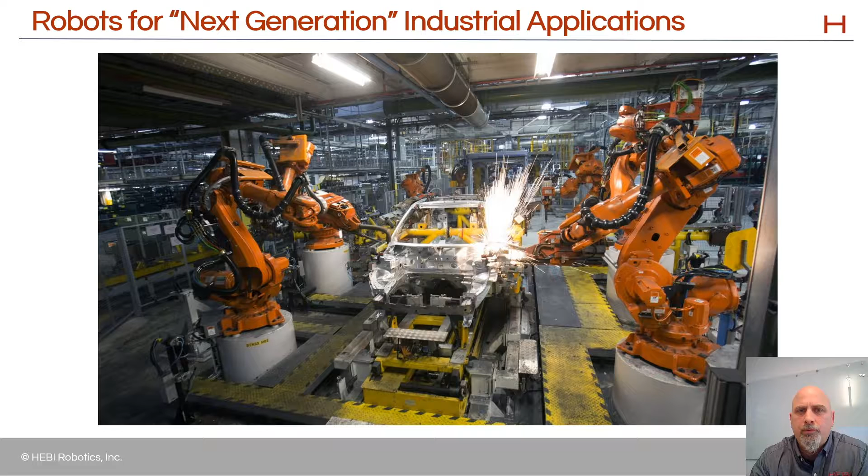This type of robot can work really well in the factory, but when you try to address opportunities for next generation automation in the field, in industries like construction and security, applications like confined space inspection, and more general industrial inspections in a variety of industries, your robot needs to be a bit different.

In these cases, you'll need a system that can be easily deployed in different environments, so something that's lightweight, very power efficient, and often the processes you're automating require more human-like motion as opposed to the rigid precision that's so important for manufacturing automation.

You're also likely dealing with highly variable workspaces, so you'll need a robot system that is at least reconfigurable, but preferably very customizable. These industries and next generation applications require different breeds of robots, which is why you're starting to see things like quadrupeds and different types of crawlers out in the field. My focus for today's discussion is on snakes or snake-like robots.

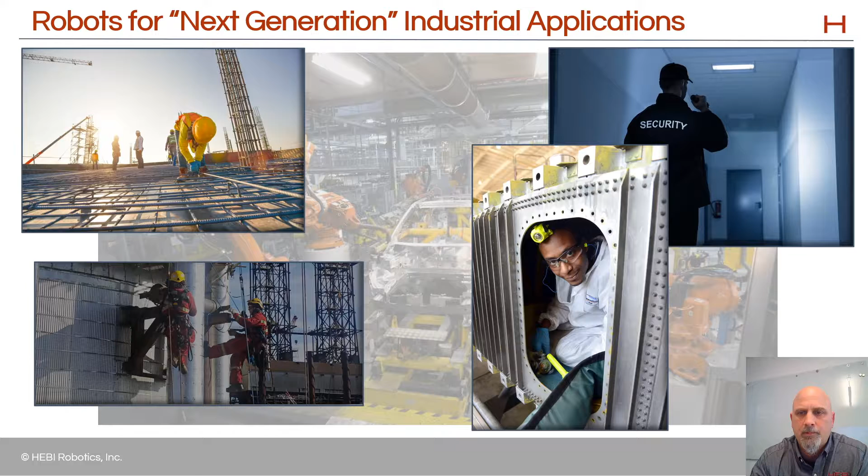Snake robots have a rich and storied history going all the way back to the 1970s when Professor Shigeo Hirose pioneered snake robot research in his lab at the Tokyo Institute of Technology. His lab used approaches like active cord mechanism and created snakes with wheels, rollers, and even swimming snakes.

Professor Hirose's lab spun off a company by the name of HiBot that I'll bet a lot of you are familiar with today. There are a number of other companies that use snake-inspired robots to address automation in industrial inspections and maintenance, including OC Robotics and, of course, HEBI Robotics. That's us. By the way, HEBI is the Japanese word for snake, which is our way of paying homage to the Japanese origins of snake robots.

One of the HEBI co-founders is Professor Howie Choset of Carnegie Mellon University. He's a robotics pioneer in his own right, and it's interesting to note that in addition to founding HEBI Robotics, he's created a number of other companies, including Medrobotics, where they develop snake robots for surgical applications.

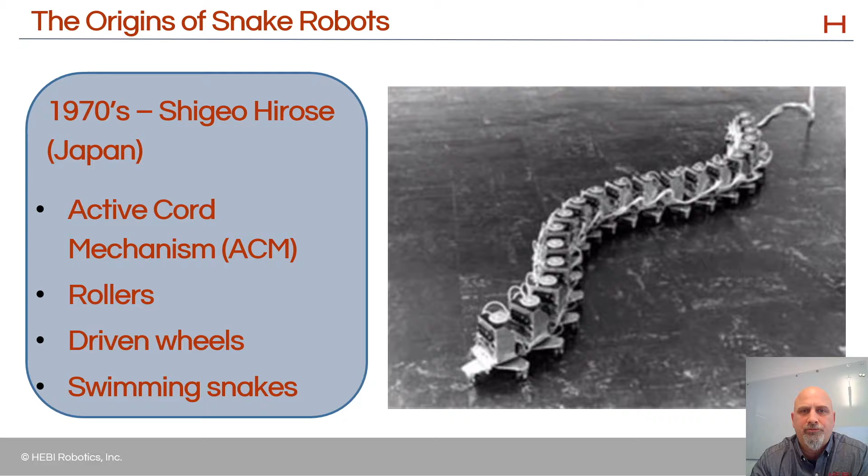There's a lot more to the history and evolution of snake robots that I won't cover here, but it's really interesting, and if you are also interested, I encourage you to view a recorded webinar that one of the other HEBI co-founders recorded earlier this month on the evolution of the snake robot.

So let's skip ahead to some recent snake robot history and take a look at the work at Carnegie Mellon University that led to HEBI Robotics.

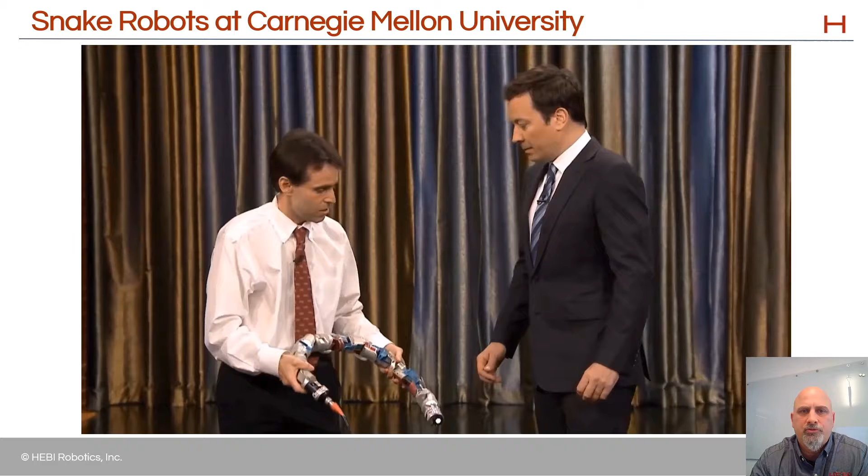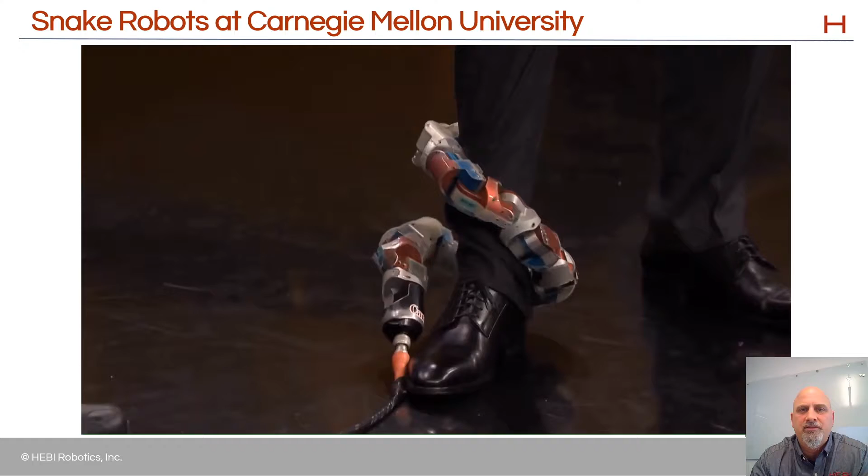I'll start with this fun video of Howie demonstrating a CMU snake robot for Jimmy Fallon on The Tonight Show. A really important contribution of Howie's lab is work focused on enhancing the ability of snake robots to sense and control torque. This enables the robot to interact with the environment in really powerful ways, which is important for a lot of the inspections and maintenance tasks that we want to automate.

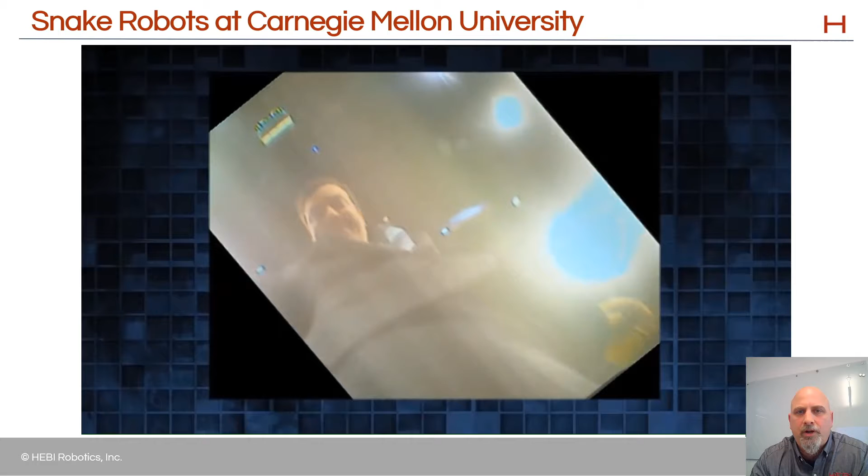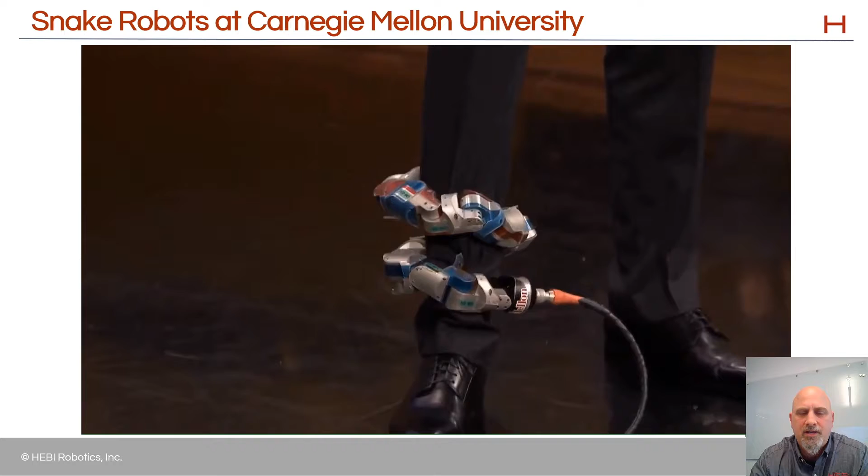Here you can see the robot using its force or torque sensing capabilities to squeeze itself around Jimmy Fallon's leg with just the right amount of force so that it can rotate and crawl up. And of course, there's the camera at the head as well. Clearly, that'll be important for visual inspection applications. There's the robot crawling back down the leg again.

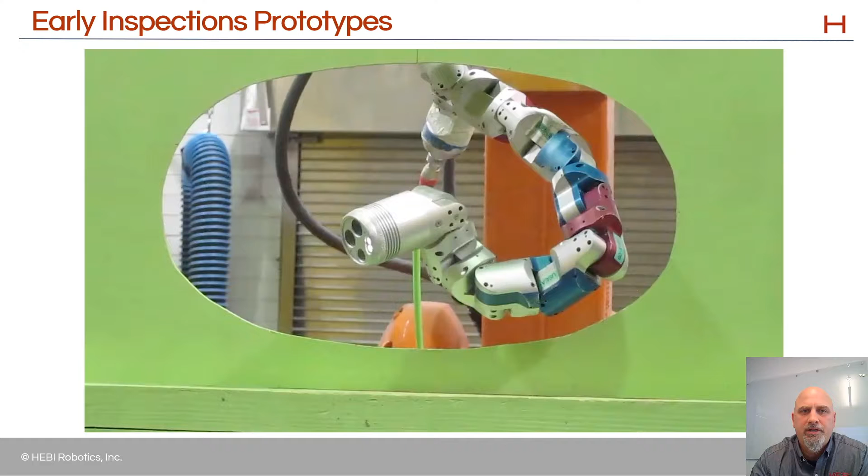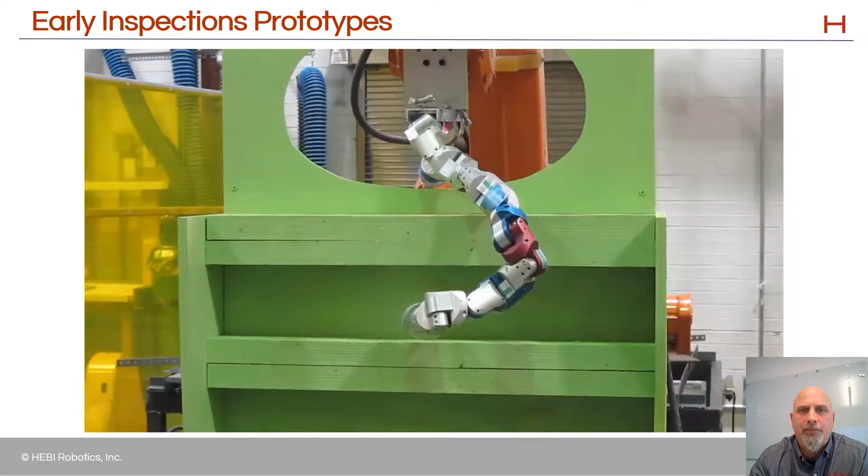Not all fun and games at Carnegie Mellon University. Early on, we identified snakes as a really useful solution for challenging industrial inspection applications. The robots are really lightweight, highly flexible, and have a very slim form factor, so they can effectively navigate really tight spaces and maneuver around obstacles to deliver sensors for inspections to confined spaces.

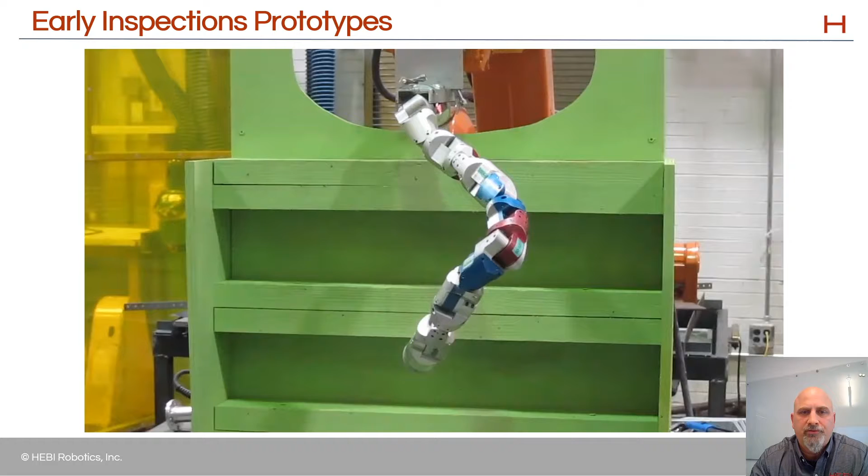As you can see in this confined space mock-up in the lab at Carnegie Mellon University, the robot can do a really great job of getting in through that tight manway and navigating around corners and around obstacles to bring that camera head to different areas of that confined space that would be difficult for a human to get to.

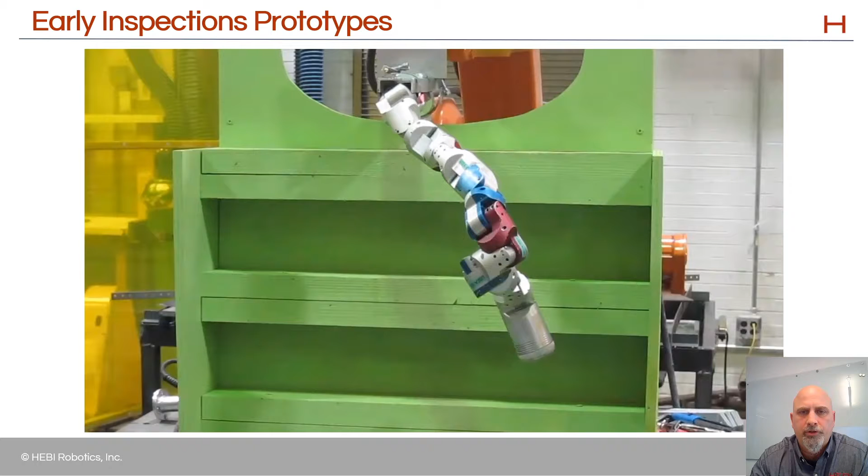Now, this snake robot form factor can be really useful, but it does have its limitations. On the plus side, snake robots are really capable at interacting with the environment, especially given the contributions from the Carnegie Mellon Snake Lab. Snake robots can navigate tight spaces, given that they have so much flexibility. They're typically very lightweight with a small form factor, especially compared with conventional robots that grew up around manufacturing automation. So that makes them far more easily deployable than those conventional robots.

On the negative side of the ledger, snake robots are really hard to control. There are a lot of joints that are interacting with one another in really complex ways, and that presents some significant control challenges. They're difficult to build. They're very complex mechanisms, and so building a snake robot can be really quite the challenge.

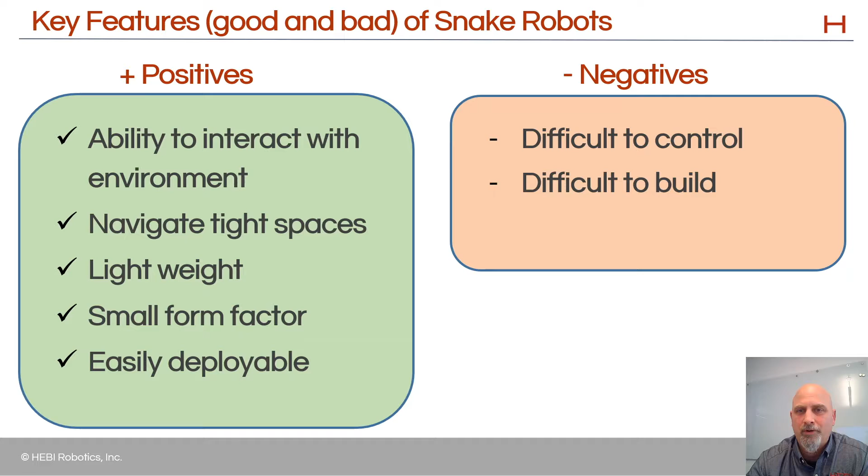And from a business development perspective, there's no real killer application that's obvious for snake robots. There are a number of applications that snakes are really good at, but for most of them you can find some other form factor that would be a bit more efficient. This makes it really difficult to scale snake robots. And so as a result, what we find is that a lot of next generation robots are evolved from or inspired by snakes, but aren't necessarily snake robots per se.

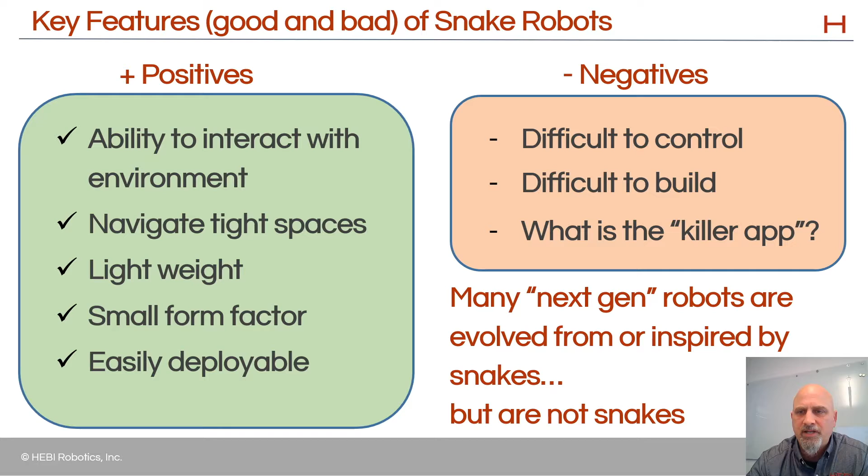So with that in mind, let's go back to CMU and take a look at some additional important work done at the lab. Now in the Snake Lab, Howie and his team wanted to find ways to streamline the design, production, and control of snake robots. And in the effort, they made some key technical contributions that made snake robots more practical, and in fact made a wide variety of robots more practical.

For example, typically in an industrial robot, there's a controller that tells all of the joints what to do in order to coordinate the motion of the robot. Howie and his team were early to the game in terms of exploring a more modernized approach to robot control, where there's a microcontroller at the joint level.

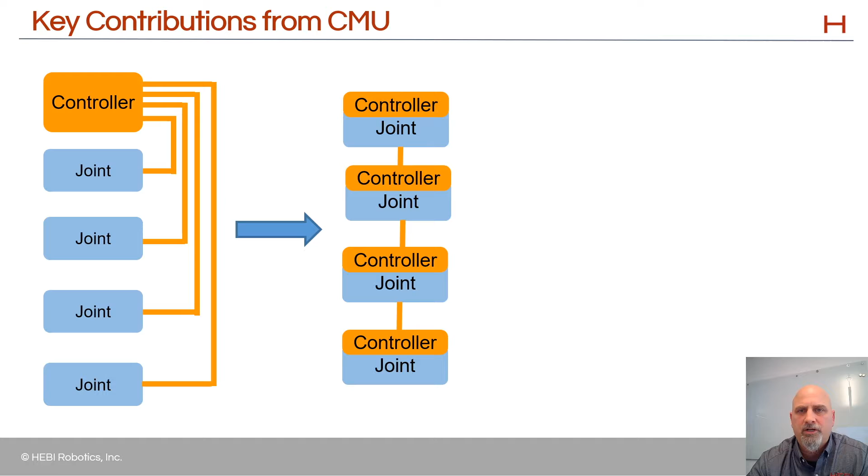With this type of architecture, you can have a lot more flexibility in designing new robot systems. You can still control the entire robot system from a controlling computer, but now the low-level processing can take place at the joint level, and the joints can more easily be swapped in and out. The robot can be more easily reconfigured or customized. At the same time, they developed powerful control software to manage a lot of the math behind making the robot move. This made it much easier to build and control snake robots.

But then what we started to see that was really interesting in the lab is that these modular robotic building blocks found their way into other types of robots as well. So this Lego-like system that was designed to make snake robots more efficient found its way into robotic arms and crawlers and all sorts of things that started to pop up in the lab.

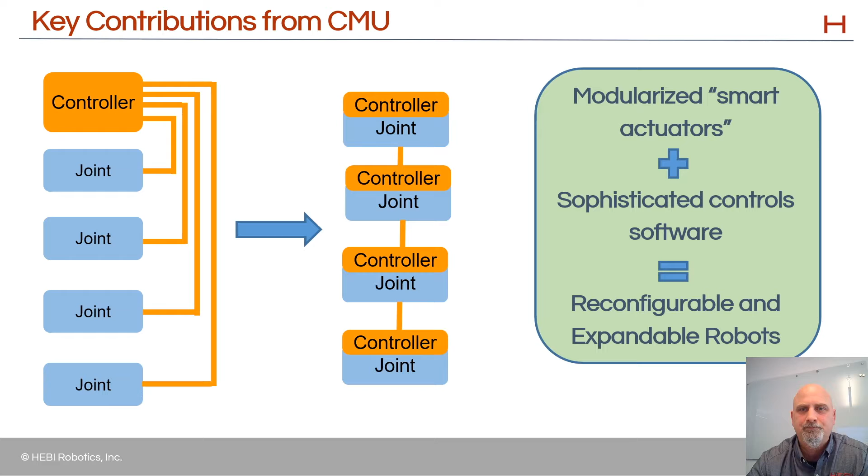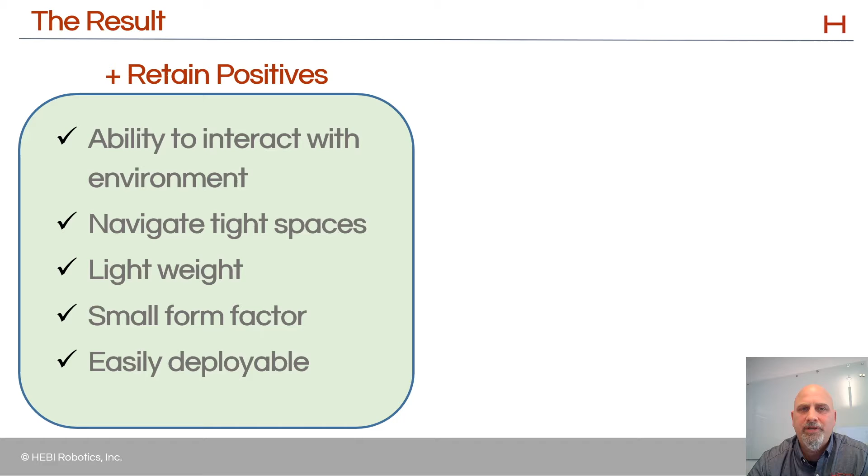And with this system, the team was able to create a platform for robotics that retained all of the positives associated with snake robots, those same things that we talked about a few slides ago, the ability to interact with the environment, navigate tight spaces, be easily deployable by virtue of the lightweight and small form factor. But we gained new capabilities that broke down barriers that had held snakes behind. For example, now we had the ability to rapidly design and iterate on that robotic design. And that in turn lowered development cost and made it possible to tackle highly variable, lower volume applications with various robotic form factors, snakes and beyond.

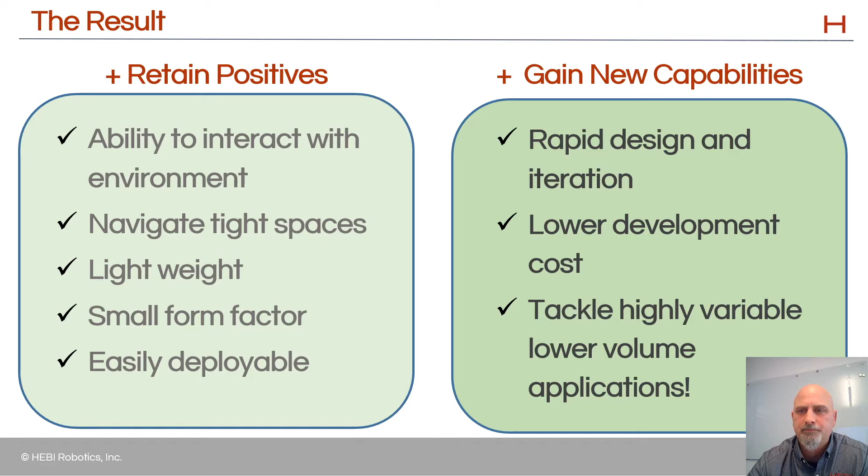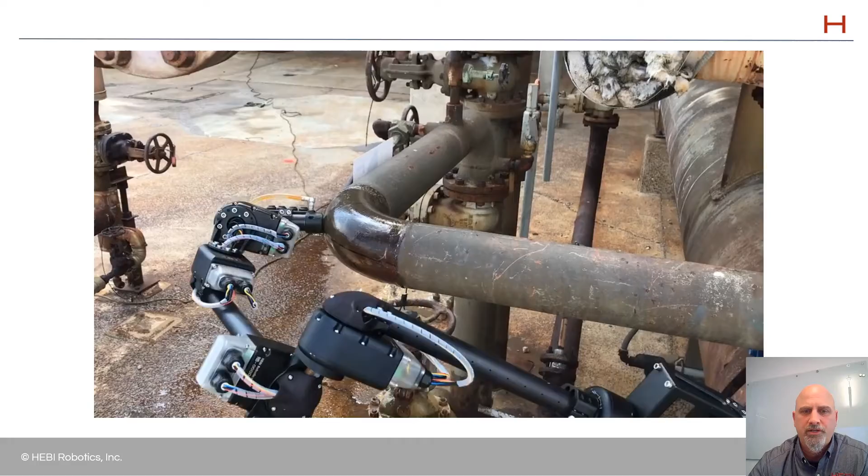So Howie and the team from his lab created HEBI Robotics to commercialize the platform and use it to address some of these next generation automation challenges not well addressed by conventional robots. And this takes us to where we are today. HEBI and our customers use the platform to create a wide variety of robots with an initial industrial focus on inspections and maintenance. And so this video you see here is an arm that we created to automate the inspection of pipe elbows and other complex geometries.

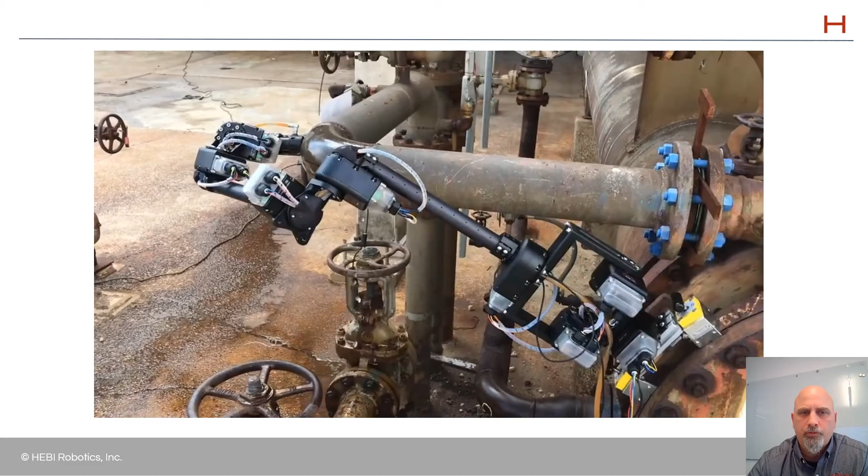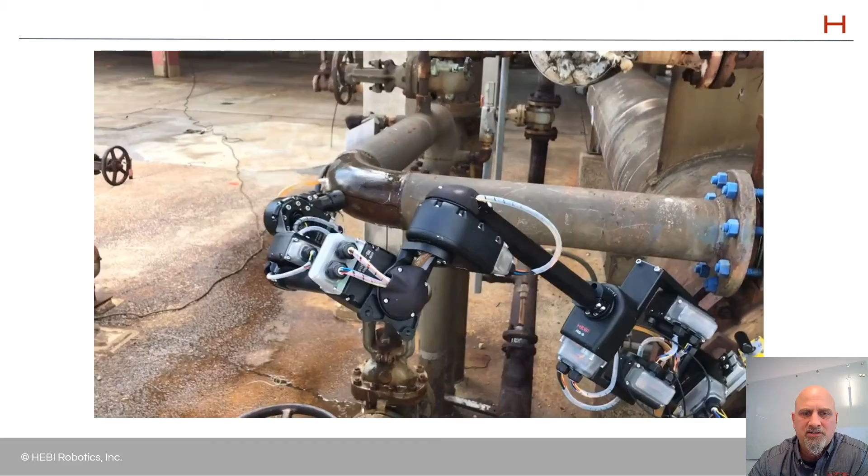So it has a UT probe at the end effector, and you recall how the system is able to sense and control torque, which made it possible for that snake to climb up Jimmy Fallon's leg by squeezing it with just the right amount of pressure. In this case, it's applying just the right amount of pressure to that end effector, which is a UT probe.

To collect thickness reading on this pipe elbow. And that same process can be applied to other complex geometries. With just a little bit of information about the geometry, whether it's a pipe elbow or a T or reducer, the system can take that probe and maintain contact between the surface and the probe to collect good thickness readings.

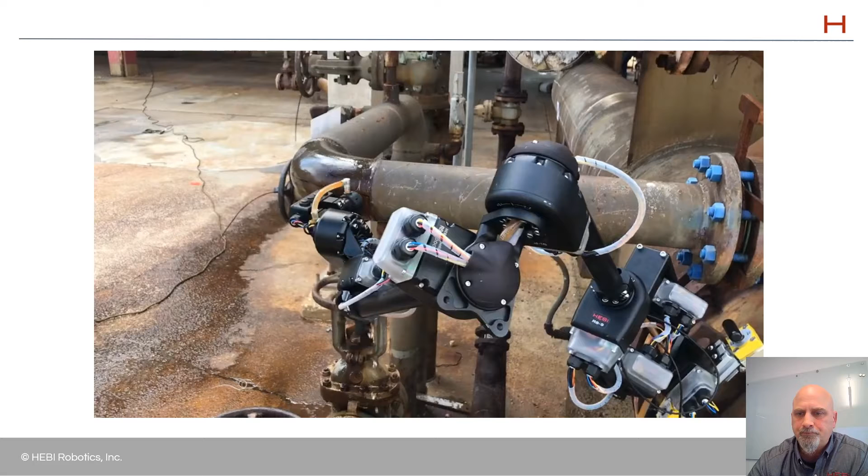And what I find to be really exciting are the possibilities for snake robots to address some really important applications in confined spaces. Confined space entry can be really dangerous, but difficult to automate.

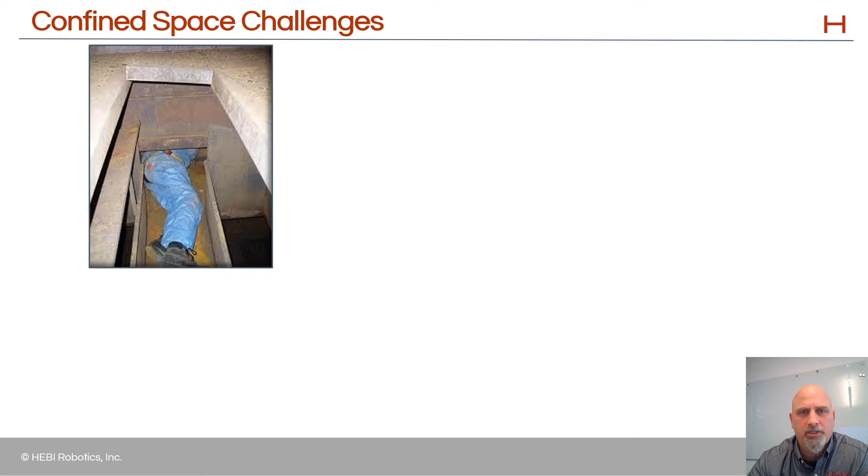So here are a few examples of some tricky workspaces. Here's a distillation tower with a manway where he's got to lay down, and the ergonomics here can be a nightmare. I would not want that job. But somebody's got to go in there and perform these inspections and maintenance.

Here's a steam boiler with some mechanical separators. There's bolts and sharp edges. Creates a really dangerous workspace.

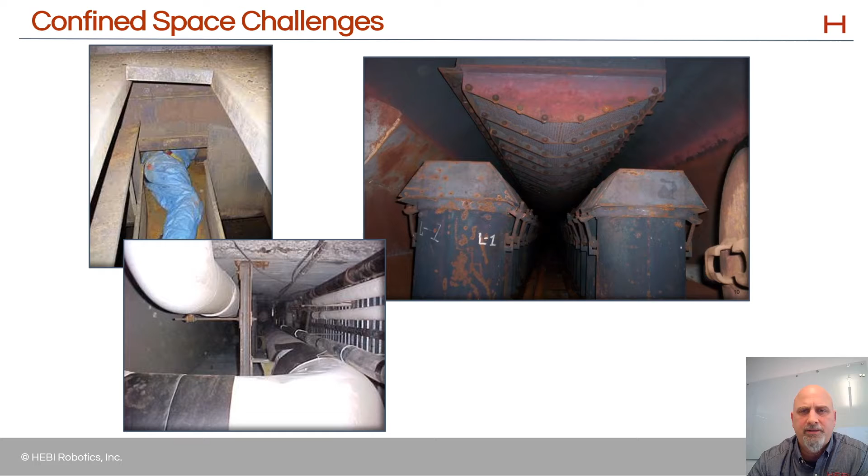This next picture looks like perhaps something below ground. There are some pipes that may need to be inspected. There are brackets and weld attachments, lots of things to maneuver. So you can imagine how it would be difficult for a person to get in there, but certainly for a robot to get in there.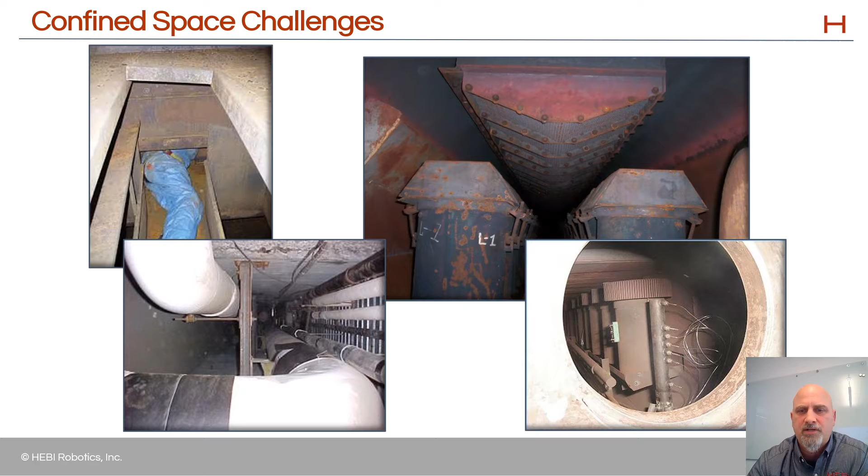So with that in mind, let me tell you a little bit about the demo that we put together for this presentation. For this demo, we built a mobile base kit with a snake-like arm as an appendage built out of our HEBI R-Series actuators so that we can emulate the visual inspection of this mock-up tank that you see in the background. In the demo, we'll include the approach to the tank, navigation within the tank, and maneuvering within the tank, and then extraction from the tank.

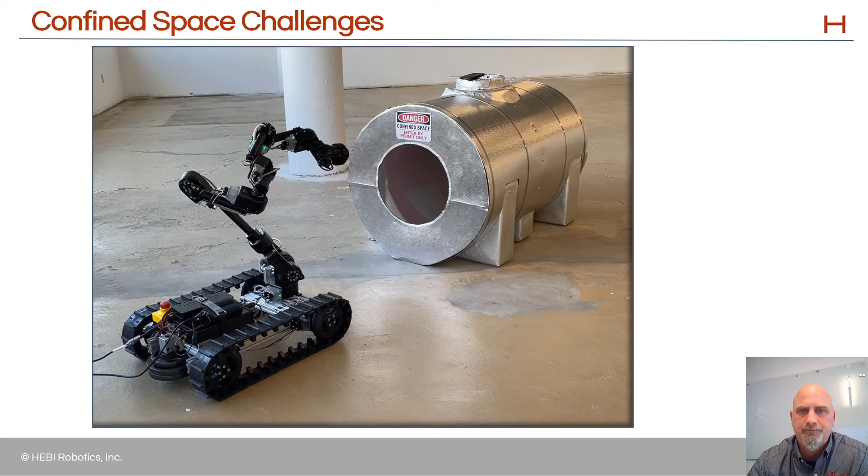Because getting the system out of the confined space is just as important as getting in. Here's a rendering of the tank that we put together.

So the robot is going to enter into that hole over on the left. It's going to navigate through a couple of plates, and the target that we want to get a visual on is that nozzle in the lower right rear, lower right on the picture in the rear of the tank.

So when you see this video that I'm about to show you, you're going to see the robot from the operator's perspective. So there will be the camera view that the operator sees, and you're also going to see the top-down view. So we put a camera in this hole at the top of the tank so that you could look down within the tank to see the robotic arm navigate through those plates.

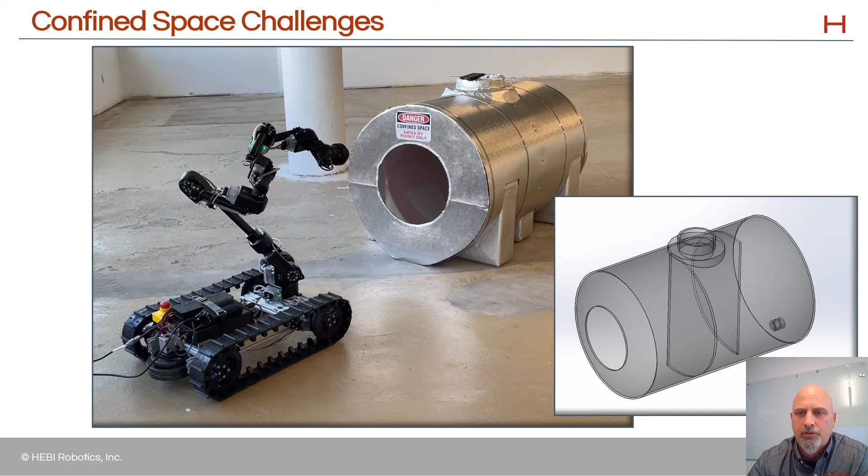So in this video, you're seeing the approach. So during any inspection, you've got to go approach the asset and make sure you're inspecting the right thing. So on the lower right, you can see the operator's view, and the upper left, you see the operator's controls. That's how they're teleoping the robot. And the arm is accessing the confined space.

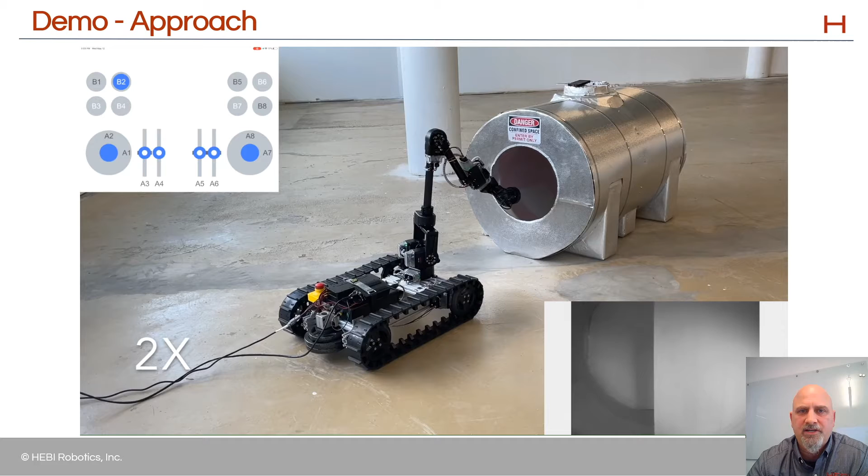Now, bear in mind that this is a wide open space with this mock-up demo. In a real life environment, you're probably going to have to navigate tight space to get to the asset that you want to inspect. And so that's why it's important to have that arm be really compact and tight and able to coil up and uncoil so that you can actually get it into the asset that you need to inspect.

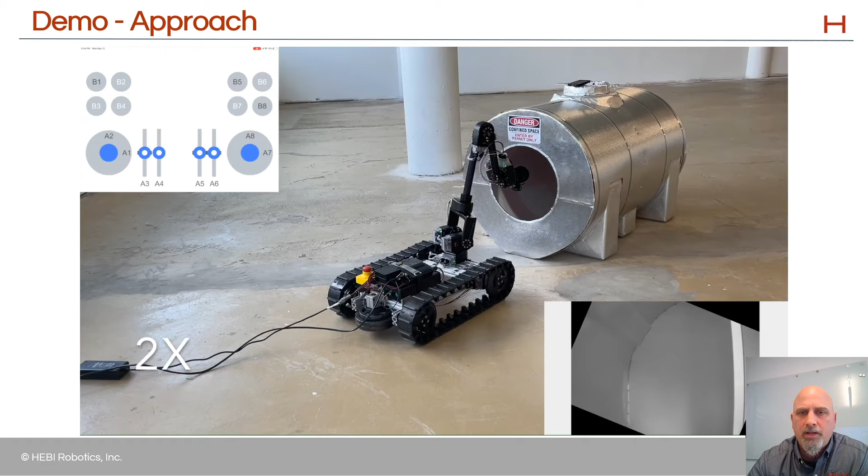Also note that the arm and the base are tightly integrated. This is a good example of how with the HEBI platform you can mix and match parts, mix and match arms and bases, or create brand new arms. And the control software makes it easy to control the entire system as a cohesive unit.

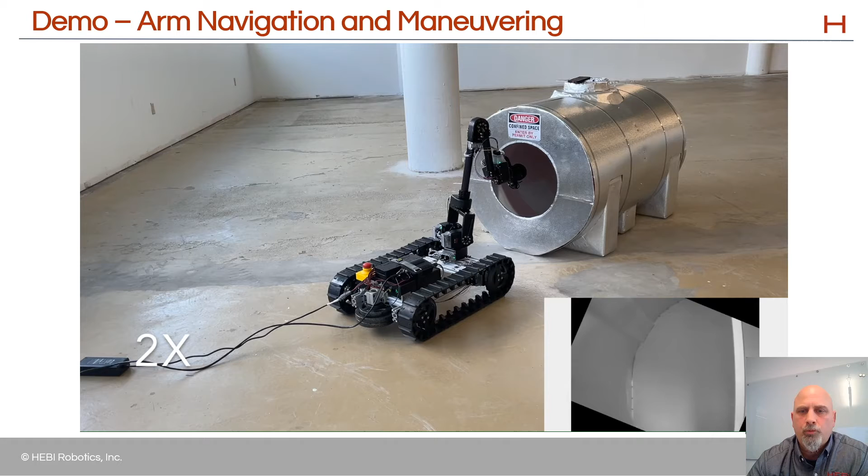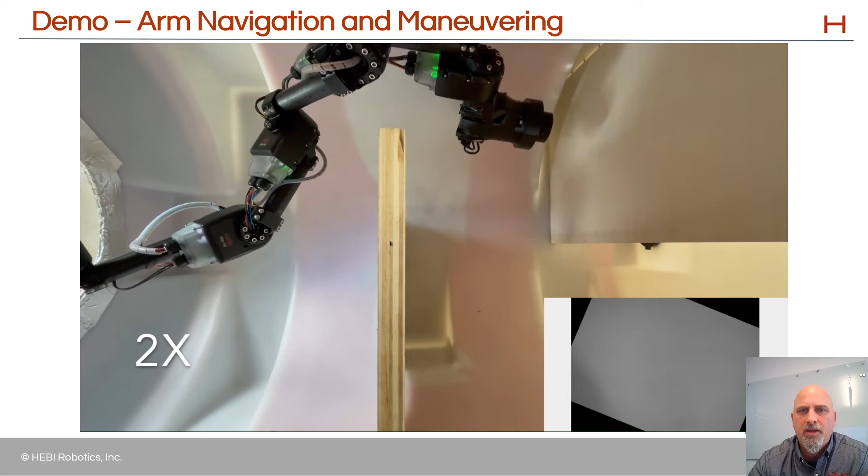Once inside the tank, the arm can unwind and maneuver about. Notice how it's being directed by the technician to look around at all the crevices and welds and so forth. Now I should point out that we're doing a visual inspection in this demo, but the system is designed so that it can interact with the environment. So we could put a probe at the end of the arm and do a UT inspection or some other sort of maintenance operation if we want.

Also bear in mind that this is a prototype we put together for the purpose of this exhibit. So we're aware that in a real life scenario, the cabling should be a little bit tighter so it doesn't get caught on the sharp edges and so forth.

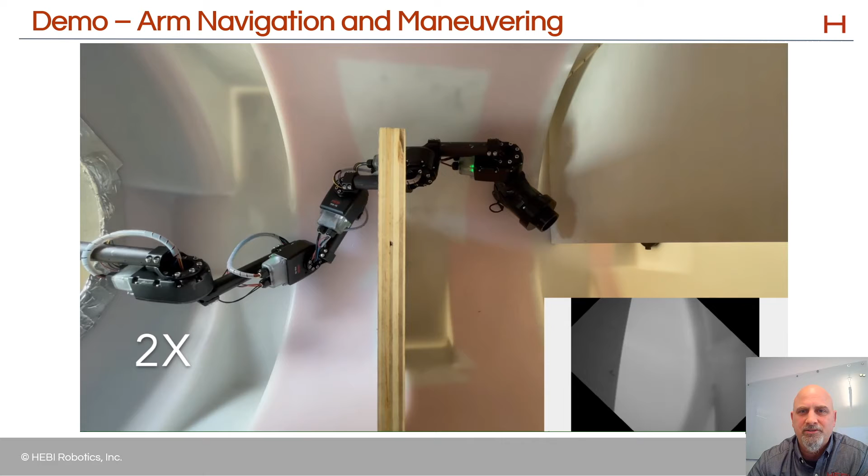Notice how as the arm maneuvers through the tank, you can't really hear it, but it's sort of bumped against the tank there because I've got the audio turned off. But since it can interact with the environment, the operator in this case is actually using that capability to sort of feel the way around that obstacle.

Remember, we're looking down into the tank, so it's navigating around the first plate and trying to find its way through the second plate, again sort of feeling his way around. We're using that ability to interact with the environment, which is handy for the operator.

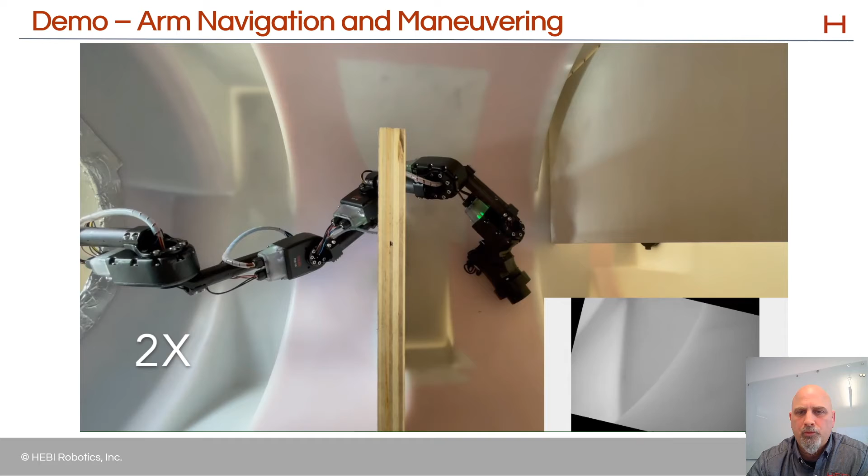Now it's going to move over a little bit, and in a moment you'll see how it identifies the target nozzle that we want to inspect. Notice how the camera remains in a fixed position, so the arm can move around and adjust the camera so you know your perspective at all times.

That nozzle, the top of the nozzle, is pointing up at 12 o'clock. That can be a real challenge oftentimes when you need to get a camera into a tight space - sometimes you don't know what's up and what's down. But the system here, that snake robot arm, can maintain the proper perspective of the camera so that you can more easily navigate.

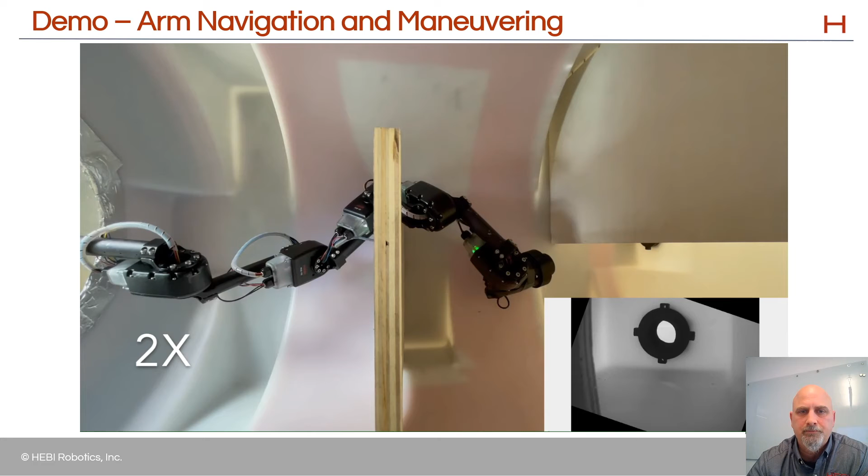Now, I mentioned earlier that there is software to take care of the math behind making the robot move. That comes in handy in a variety of ways. It's logging the position of all the different joints at all points in time and various sensors on that robot, collecting data that could be very useful.

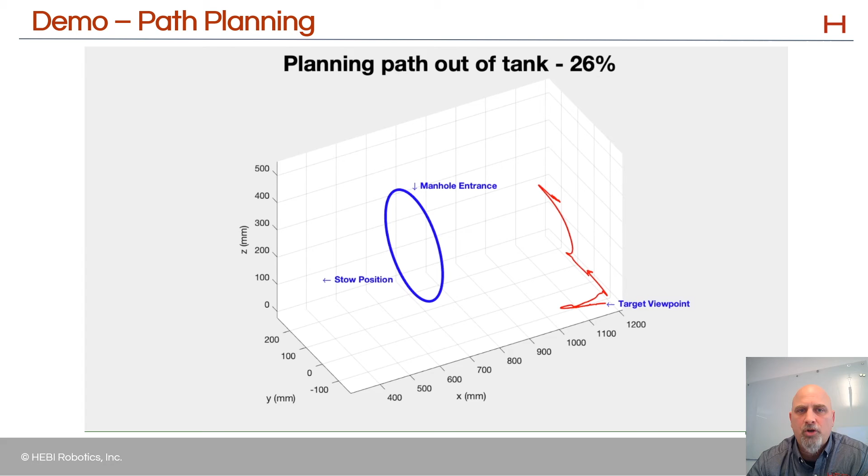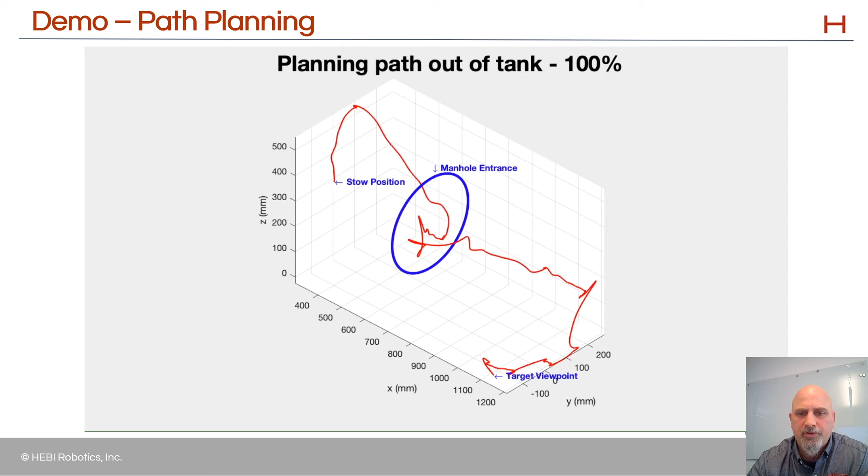In this case, we're using that positional information of each of the joints to track the motion of the robot, which will be very useful in getting the robot back out. So we're tracking the position of the robot as it enters that confined space. In order to extract the robot, we're just going to reverse course. Here's a little image of the system's recording of that path.

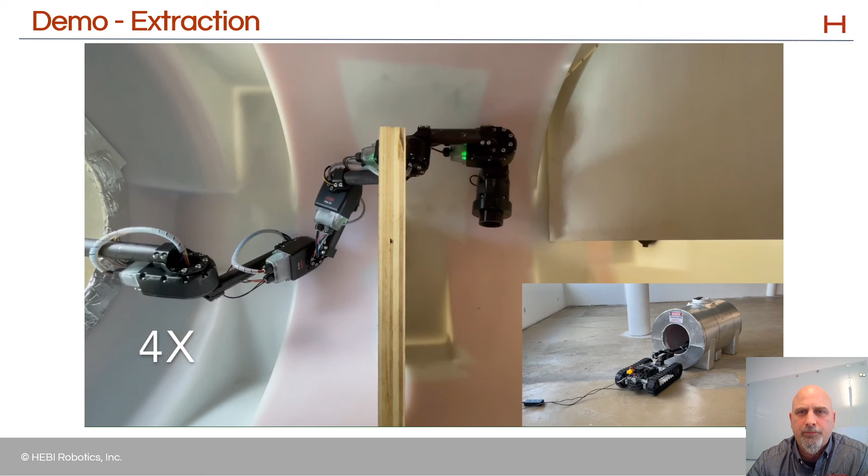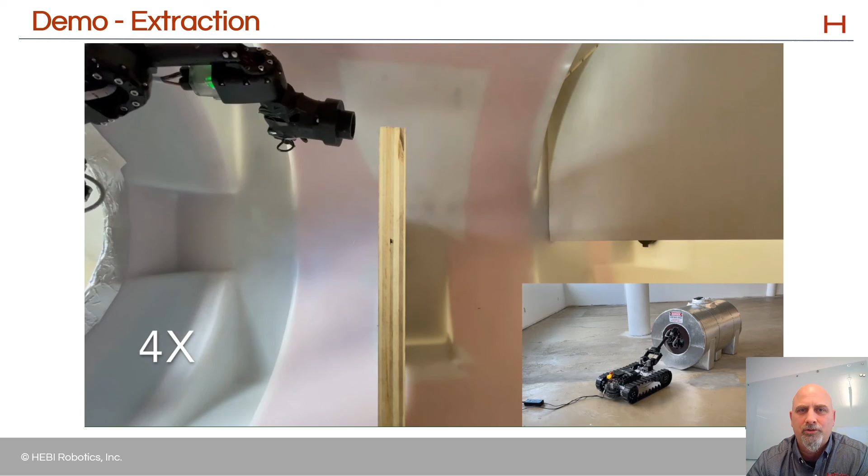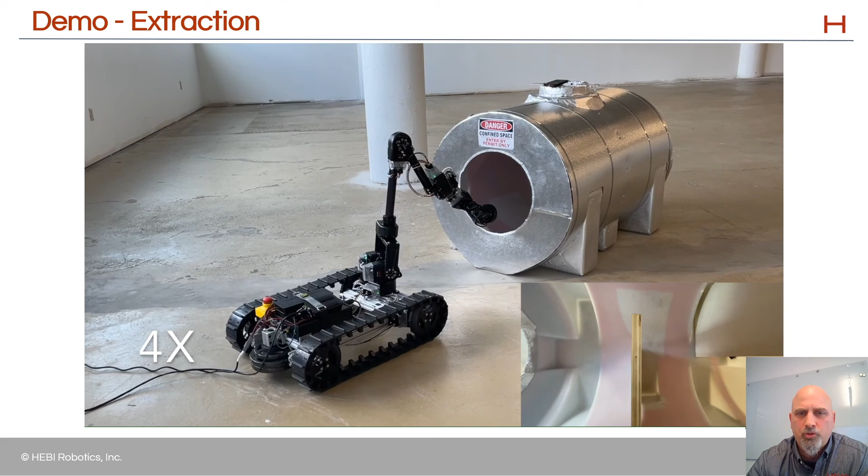So those tools that figure out the math required to make the robot move store that information. Now when it comes time to remove the robot from the confined space, it's just a matter of reversing course. Think about it - the operator doesn't have the luxury of seeing where he or she is going by virtue of that camera at the head, unless you turn the camera around. But it's not necessary, because the robot can just undo what it had already done, integrate it tightly with the mobile base to extract the arm and remove itself from that space.